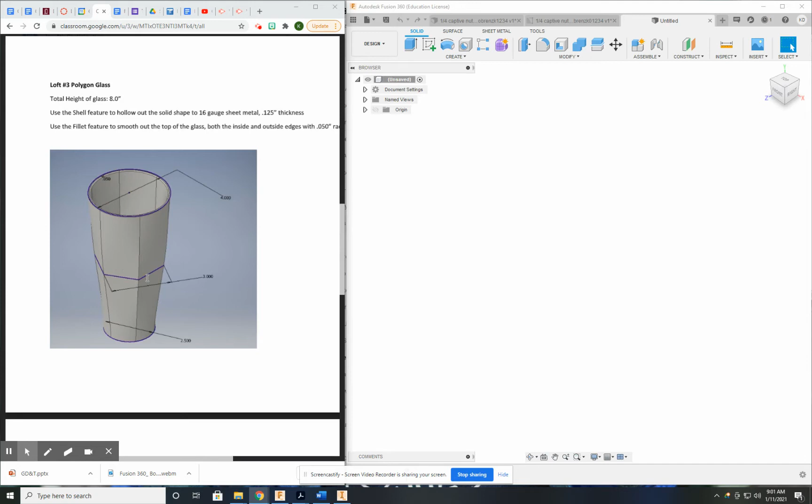This video is going to demonstrate how to do a loft with 3 different sketches. As you can see here, essentially I'm making a glass. I titled this one the Polygon glass. The total height is 8 inches, and I have 3 sketches here. I have a circular sketch on the top, circular on the bottom, and the one in the middle is a hexagon. So let's go ahead and make this.

I'm going to start with a circle, and I always like to use the center point when possible. The diameter of this bottom one is 1.5 inches. Simple as that for the first one. Now the offset between the 3 sketches is 8 inches divided by 2. So that's going to be 4 inches to here and 4 inches to here.

So let's go ahead and create some offset planes. So from here, it's going up 4 inches. And I can do it now or later. From this, we're going to go up another 4. Oh, not minus. No. 4. Perfect. All right, so there's my 2 other planes.

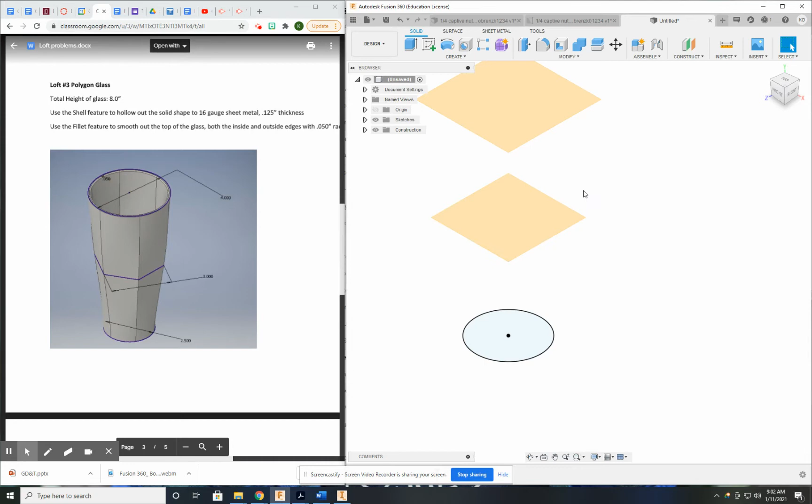So let's go ahead and create a sketch on this plane. And I'm going to use that same center point to line everything up. And I'm going to use a polygon this time. Okay. And let's make sure I have 6 sides, which is the default, probably what I used last time. And I'm not going to place any dimensions at this time because I want to use the dimensions I'm given here.

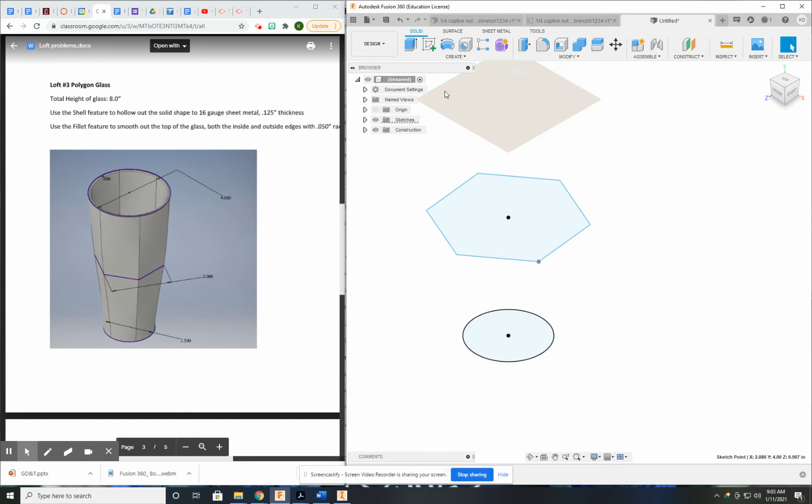Okay. Now I'm going to get out of this real quick because I just want to make sure I'm orienting it per the dimensions. So with my home view, that's about the right orientation. So I'm going to go ahead and open that sketch up again. All right, so it looks like I want this to be vertical. Good. Now, essentially, I am going flat to flat here, and that is going to be 3 inches.

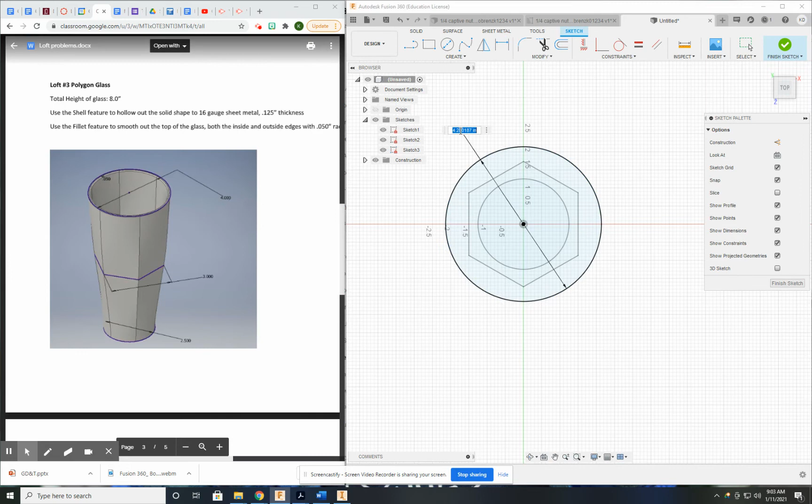Looks good, fully constrained. And now this top plane is just going to be another circle. This one is going to have a diameter of 4 inches. Okay. Now let's go ahead and loft it. Now when we loft it, it's going to create a solid, so we're going to have to come back and shell it. But overall, the proportions look excellent.

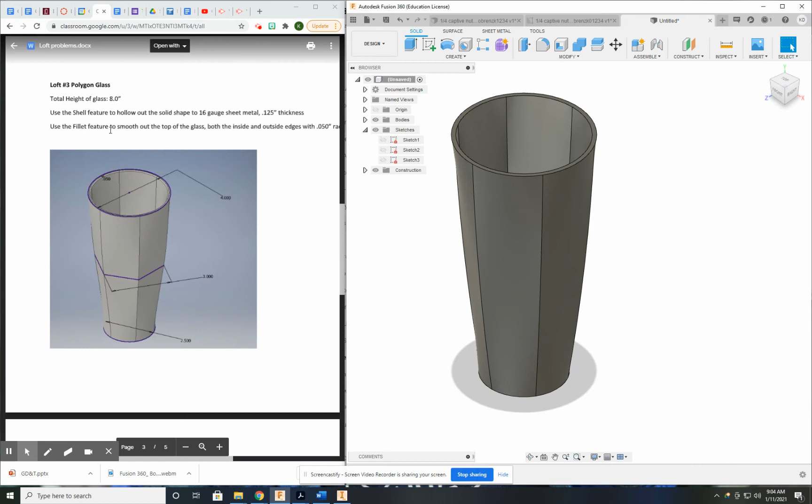Now let's go back and shell it, and if I look here, shell feature, I'm going to do a 0.125 thickness, and should not have retained that 16 gauge sheet metal, but I was probably in a hurry making that assignment. All right. Now it also says use a fillet to smooth out the top of the glass and to use a 0.05 radius on it. So let's do that. So here's my fillet tool.

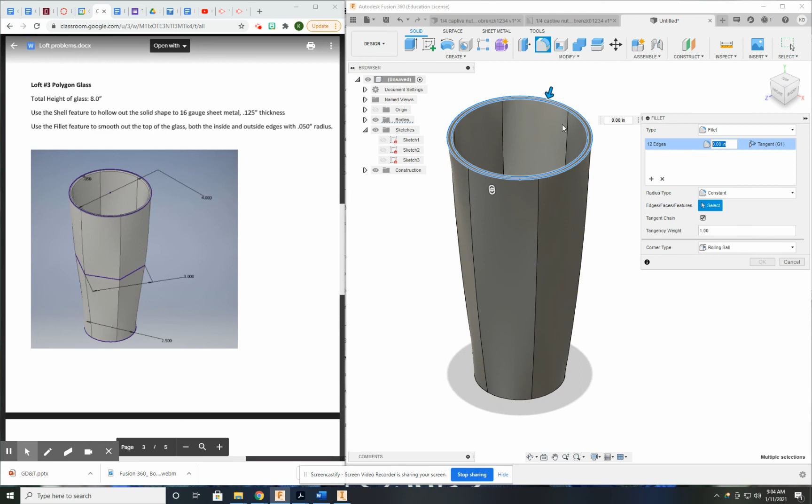And if you think about it, if I'm making a glass here, then I want it to be nice and smooth on the top. It's actually very important. Sharp edges at the top of a glass do not sound appealing. Okay, now 0.05 in here, and we need such a small radius because if it was larger, it would interfere and not let us create it. Hence 0.05. All right, that actually looks really good.

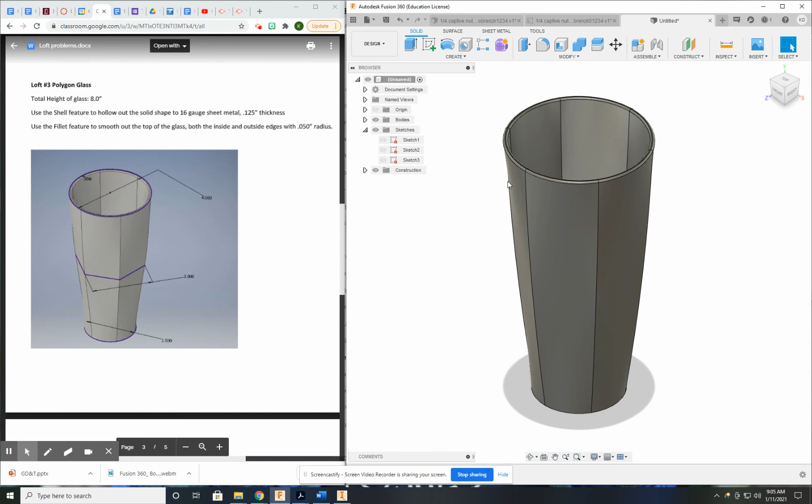Let's go ahead and kind of step back and see if that looks right. Looks good to me. Excellent. That's how you do the polygon here. And because it is a vessel, at the bottom we are just going to absolutely leave that solid. That's going to be responsible for holding our material, but otherwise the shell tool does an excellent job of hollowing out structures. Definitely something you want to put in your tool bag.